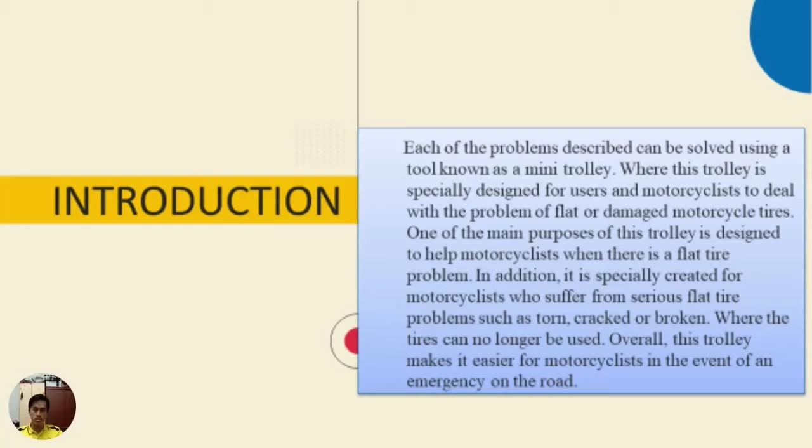Next, type of research. The type of research we use is applied research. Applied research is designed to identify solutions to specific problems or find answers to specific questions. The research is meant to offer knowledge that is applicable and implementable. In our case, we identify a solution to create a perfect design for an emergency motorcycle trolley to help motorcyclists that have problems with flat tires.

Next, scope of the research. The study focused on designing a tool or product for consumers and motorcyclists out there. This device is named Emergency Motorcycle Trolley, which is used for motorcycles with capacity below 150cc. This tool is only recommended for motorcycles that weigh 130 kg and below. It is suitable for use on flat road surfaces such as tar and cement. The speed that this trolley can reach is only in the range of 40 km/h.

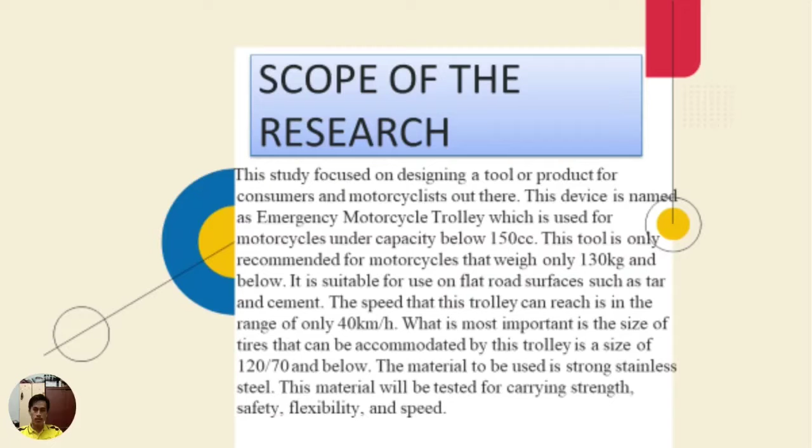And most importantly, the size of tire that can be recommended for this trolley is 120/70 and below. For our product, the material to be used is strong stainless steel. This material will be tested for carrying strength, safety, flexibility, and speed.

Now, definition of project. Emergency motorcycle trolley is innovated based on the towing tool, where towing usually uses a hook and towing truck. Therefore, this trolley tool is specially designed for motorcycles only when the user encounters an emergency on the road. This tool is easy to use. The way is to put the motorcycle tire on it and fasten it. The tool we want to design is not in our market, which is why we went to make it. As our supervisor said, it doesn't matter even if it's small. The important thing is it's useful.

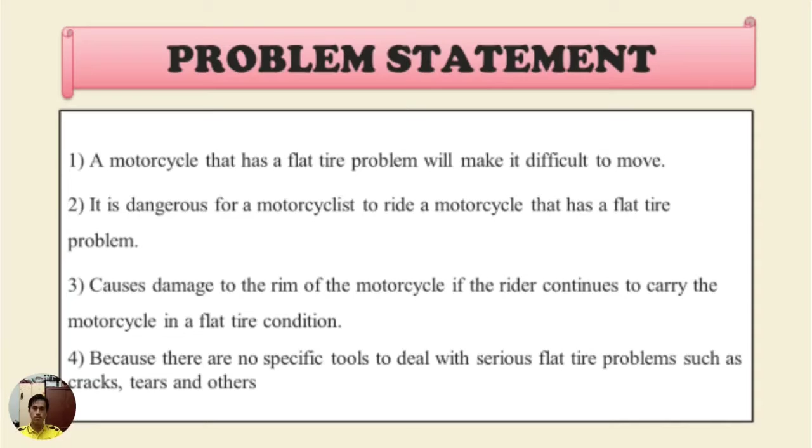Next, there are four problem statements. First, a motorcycle that has a flat tire problem will be difficult to move. Second, it's dangerous for a motorcyclist to ride a motorcycle that has a flat tire. Third, it causes damage to the rim of the motorcycle if the rider continues to ride the motorcycle in a flat tire condition. The last one is that there are no specific tools to deal with serious flat tire problems such as cracks, tears and others.

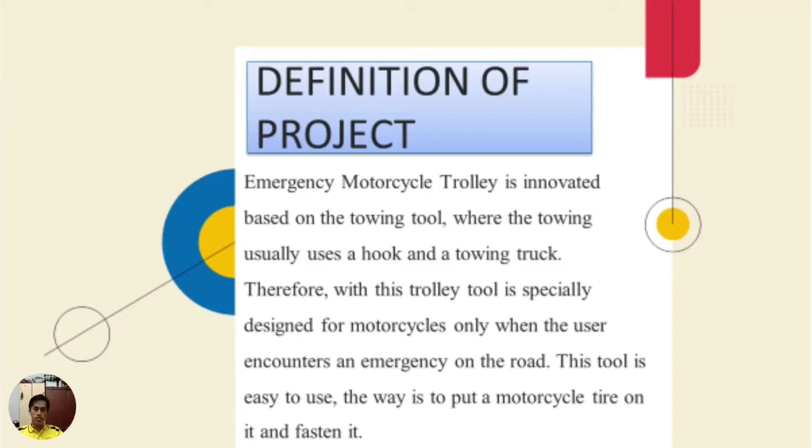The main objective of our project is to study and design an emergency motorcycle trolley. That is our objective. Expected project findings. The findings or results expected to be obtained are being able to help motorcyclists when they experience flat tire problems. This trolley is used by motorcyclists who have serious flat tire problems, such as torn, cracked or broken, where the tire can no longer be used. Next, to facilitate motorcyclists in the event of an emergency on the road. So that's all from me for the description of our proposal project.

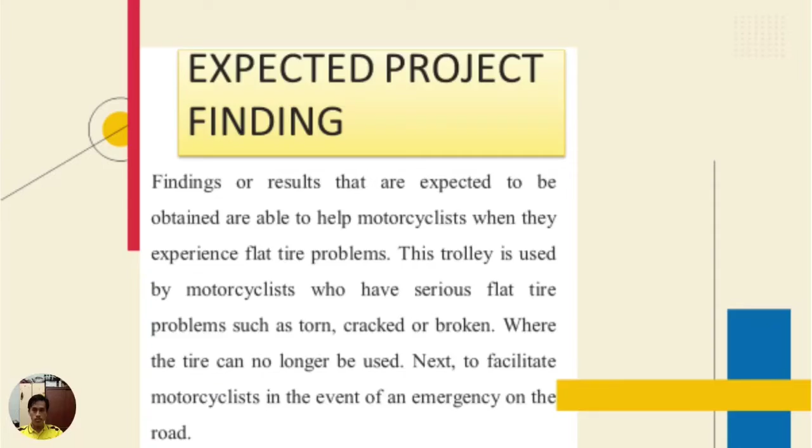Okay, thank you to my friend Sarkalas for the previous presentation. And next is me, and I'm going to present about our project question. So, the first question that we ask people surrounding us is what problems often occur when you ride a motorcycle. Second, we would ask what methods do you use when dealing with a flat tire.

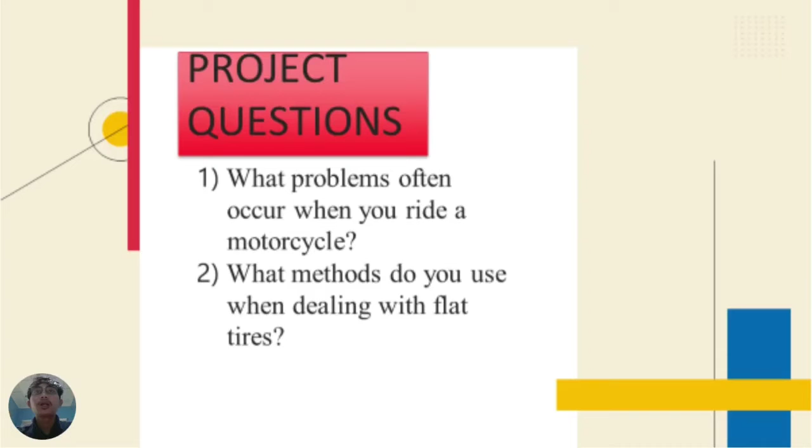Next, we go to the house of quality of our product, which we used to classify the specification of our motorcycles and the problems that occur to every user, to rate them, and we take it as a comparison for our three concepts from each group mate.

So this table shows that most customers prefer a portable use for our product, which is easy to bring anywhere and easy to use when it is needed. Next, the type of wheel shows that a durable wheel is very important for our product because it is used on the road, and the road is not always in a good condition and it is up and down.

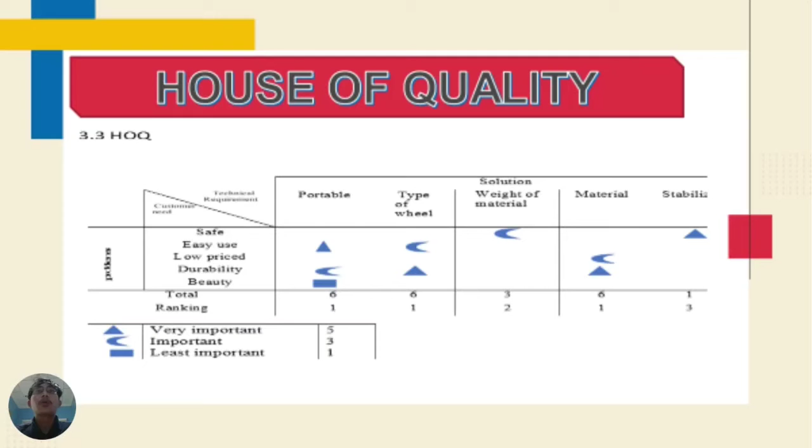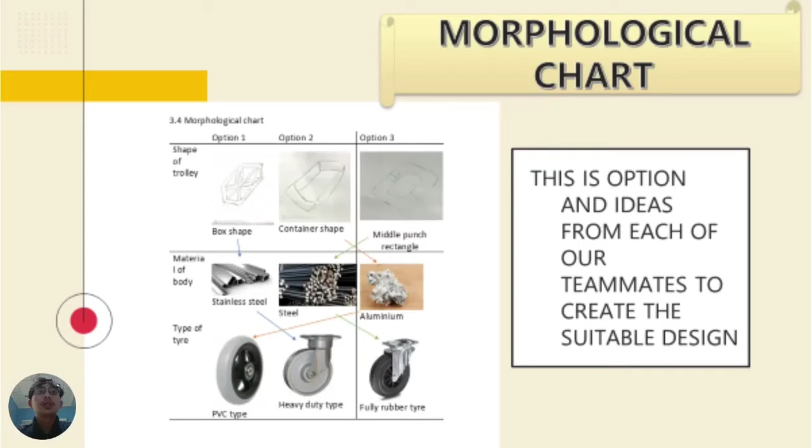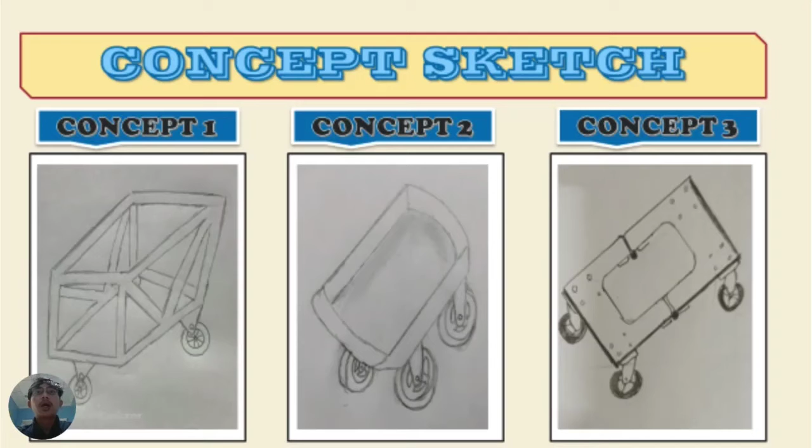For the morphological chart, there are three concepts that each of our members came out with. The first concept is the box container, the second concept is the container type, and the third concept is the mounting plate type. Sorry, the iron plate type. And from the survey, we came to know that the iron plate type is the most suitable product for us to come out with.

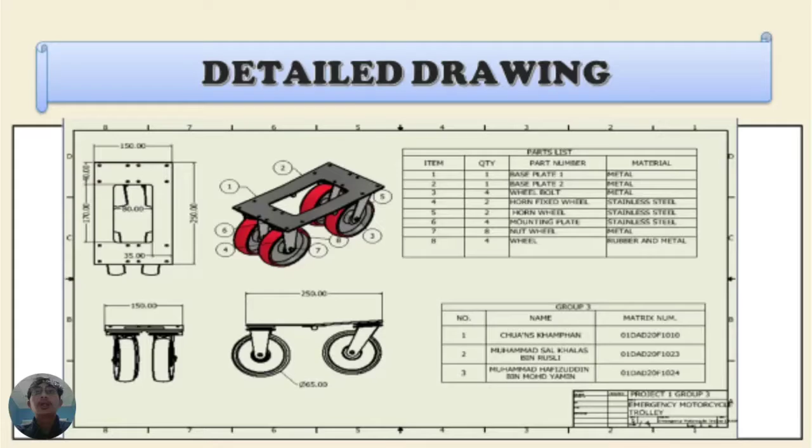And this is our detailed drawing, with the base plate, wheel bolt, horn fixed wheel, mounting plate, nut wheel, and our final CAD design is this one.

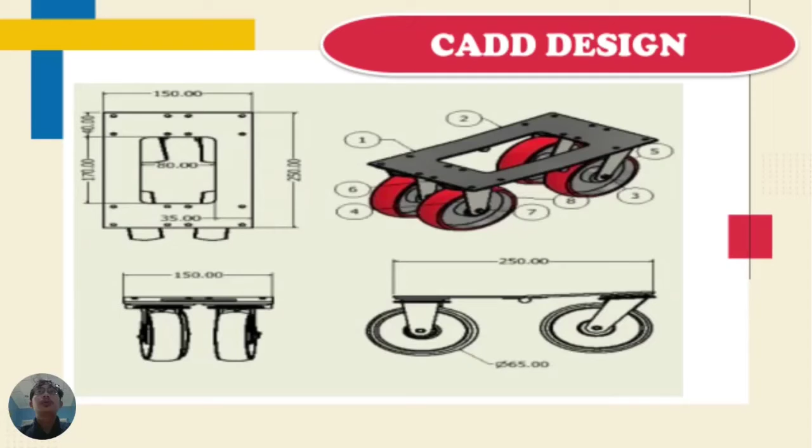Thank you to my friend for the previous slide's explanation. I will continue this presentation for the other slides. My name is Muhammad Hafizuddin bin Mohd Yamin, and my matrix number is 01DAD20F1024. So let's continue this presentation for our product tree.

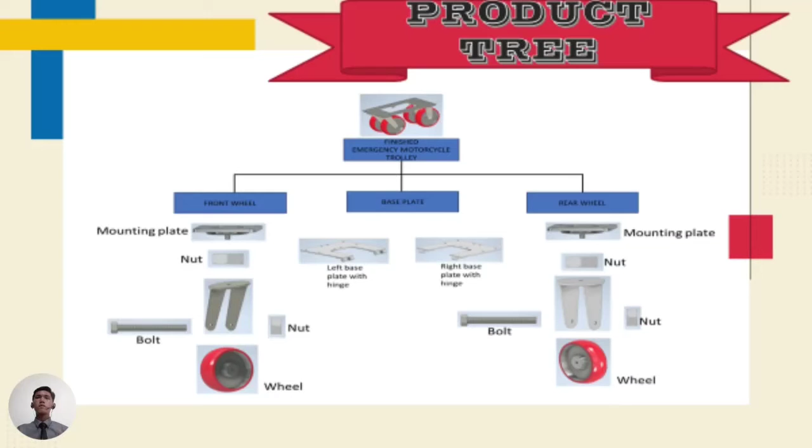As you can see on our product tree, we divided it into three parts. The first, front wheel, has mounting plate, nut, bolt, and wheel. The second one, which is base plate on our project, has left base plate with hinge and right base plate with hinge. And for the last part, which is rear wheel, the components are the same as the front wheel components. So, let's move on to the product structure tree.

The third item is the wheel bolt that is used to fasten the wheel to the wheel horn. Next, we use two types of horn, namely fixed wheel horn that cannot move and horn wheel that can rotate 360 degrees, and it is listed as our 4th and 5th items. The 6th item, the mounting plate, is joined with the horn wheel to be used as a trolley wheel. And the 7th item, the wheel nut, is used to fasten together the wheel bolt and to fasten the horn wheel together with the mounting plate.

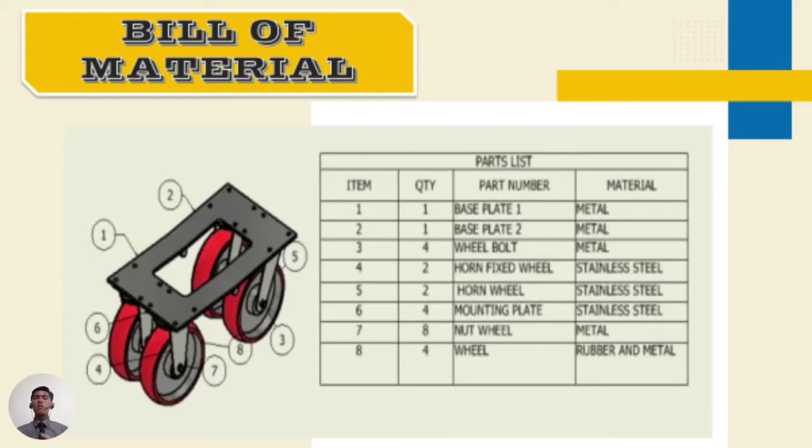And the last one, the most important item to make this project successful, is the wheel that will help our project move. After the description by me and my friend about the components and the type of components to be used, we move on to the estimated cost.

Here we searched the price of the components to be used and the total number of components. As you can see, after our search, we found that the iron plate to be used is 30 ringgit Malaysia for 1 unit, and the adjustable caster wheel price is 25 ringgit Malaysia for 2 units. Also, our dead caster wheel, we must use 2 units and it costs 20 ringgit Malaysia.

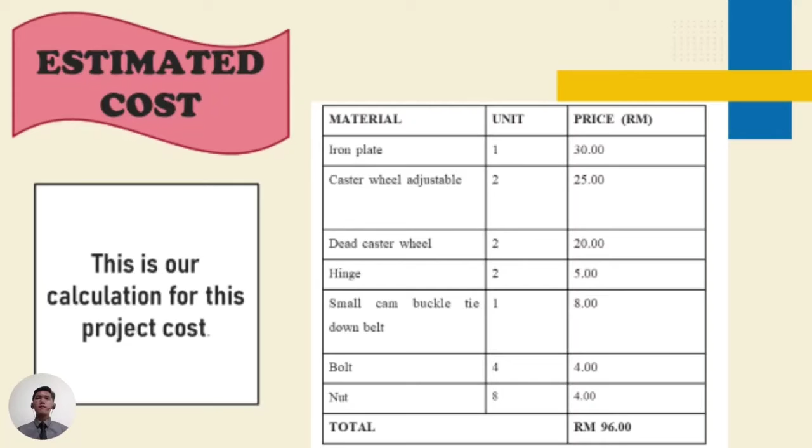Not to forget the hinge, which costs 5 ringgit Malaysia, and we will also use a small cam buckle tie-down belt which costs 8 ringgit Malaysia, and bolts and nuts to fasten our project, at a price of 4 ringgit Malaysia for 4 units and 8 units at a price of 4 ringgit Malaysia. After calculating the number of components that we will use along with their price, the total is 96 ringgit Malaysia. So, let's move on to the fabrication method.

The first one is the drilling process. Drilling is a cutting process that uses a drill bit to cut a hole of circular cross section in solid material. The drill bit is usually a rotary cutting tool, often multi-point. The bit is pressed against the workpiece and rotated at rates from 100 to 1000 revolutions per minute. This forces the cutting edge against the workpiece, cutting off chips from the hole as it is drilled.

We use a drilling process to make holes on our project. The holes we use to insert the wheels on our project.

And the second one is the welding process. Welding is a fabrication process whereby 2 or more parts are fused together by means of heat, pressure, or both, forming a joint as the part cools. Welding is usually used on metal and thermoplastic, but can also be used on wood. The completely welded joint may be referred to as a weldment. The welding process is very important for our project, because we do the welding process to join the components of our project.

Therefore, this process is very important to ensure the durability and quality of our product. Other than that, we also use the milling process. Milling is a fabrication process in which a workpiece is moved past a rotating tool.

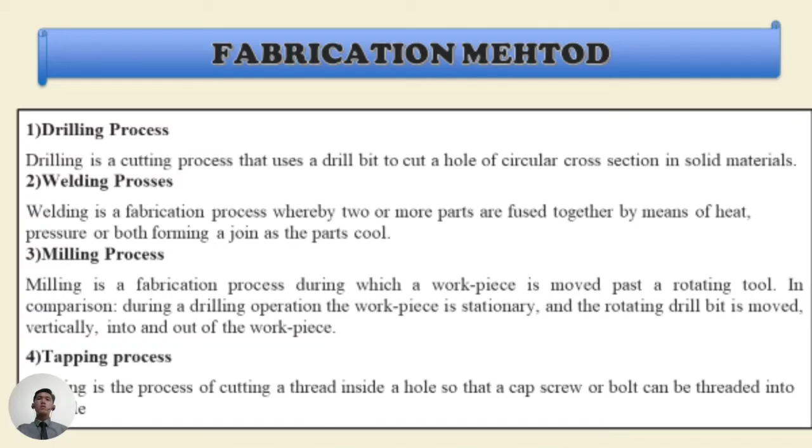We use this tapping process when we want to make a thread on the main component of our project to allow screws to install our wheels on the component. This process makes our project result neater and of better quality. So let's move to the next slide, that is project testing.

First is the load test. The load test is conducted using a motorcycle that weighs around 100 kg to 200 kg, whether there is no rider or there is a rider. Second is the surface test. The emergency motorcycle trolley prototype is tested on terrain with a variety of surface characteristics, including rough, smooth and uneven terrain. This test is carried out to confirm the emergency motorcycle trolley's functionality on various types of terrain.

Other than that, there is the stabilization test. The emergency motorcycle trolley prototype is tested for stability while riding and when not riding. And the fourth is speed testing. The speed test is performed at a rate of 20 km per hour to 80 km per hour on each type of road. And the last is safety testing.

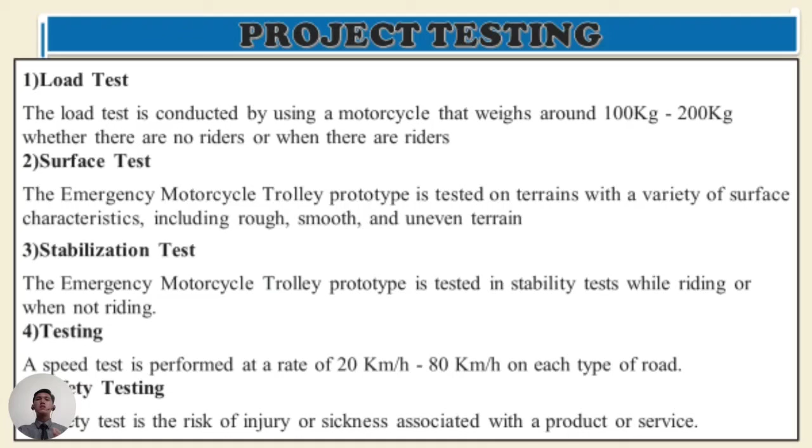A safety test assesses the risk of injury or sickness associated with a product or service. This considers hazards related to the product in real world conditions. The emergency motorcycle trolley has undergone safety tests in terms of stability, speed, durability, and quality. This test is done to ensure that the project is safe for use by motorcyclists and achieves the recommended quality.

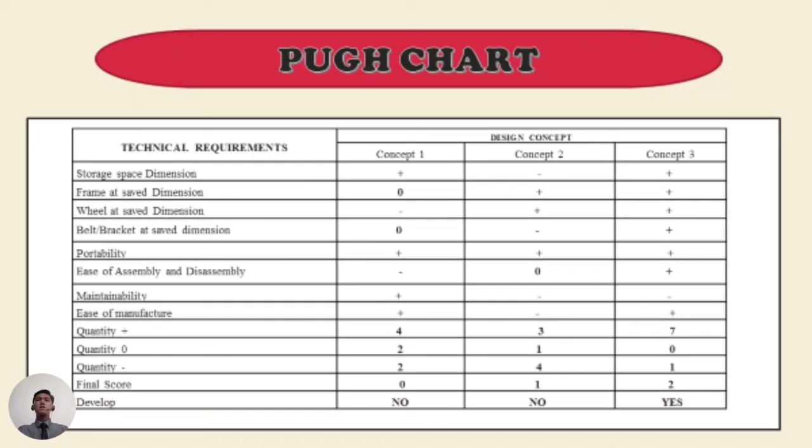So we move on to the next slide, which is the Pugh chart. Through the Pugh chart, we made a vote for the selection of the three concepts of our emergency motorcycle trolley. After the calculation of our concept selection, we agreed to choose concept 3 for our project. The Pugh chart helps us to choose the concept that we will use.